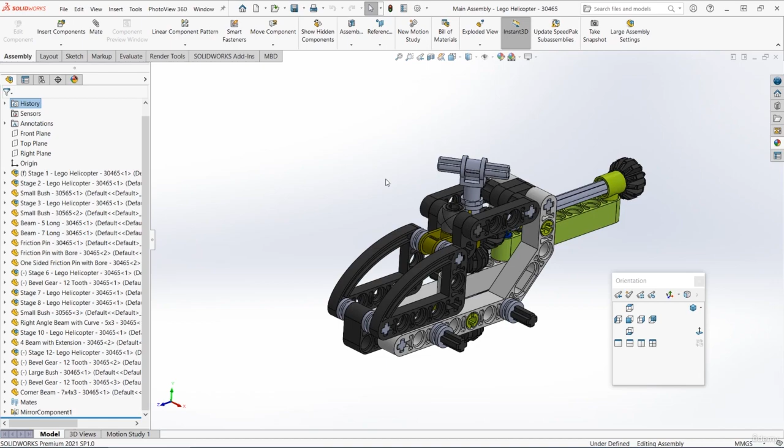Welcome to stage 18. For this we've got to make 3 new parts, and the first one is pretty simple. It's just a friction pin that's got an axle that's 2 blocks long on one side of it. First I'm going to open one of our existing friction pins. I'm going to spin around and have a look, and there's one underneath here, so I'm going to click on that and press open part.

Then let's save this part as a copy. So go to File, Save As, choose Save as Copy and Open. And I'm going to call it friction pin with long axle. We can then close the original document, and now let's make some changes to this new part.

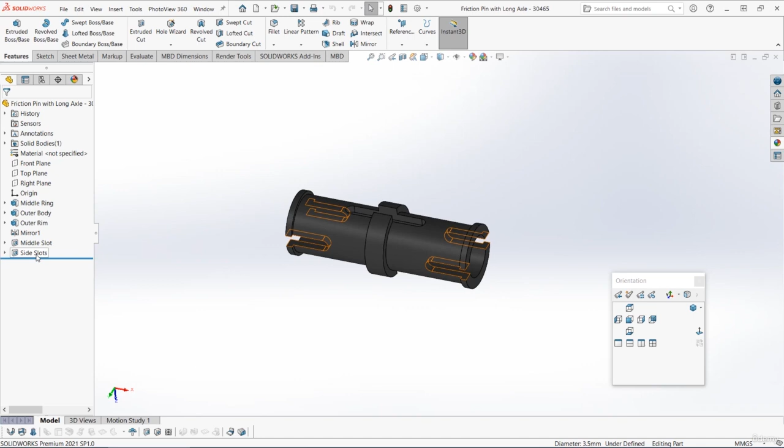Firstly, I'm going to drag up to that middle ring, the first feature. We actually only want this to be half the thickness it is now, and we only want it to go in one direction instead of mid-plane. So let's edit that feature. Let's change it from 1.6 down to 0.8, and let's change it from mid-plane to blind. Then you can exit that feature, and we can go down below the next one, the outer body.

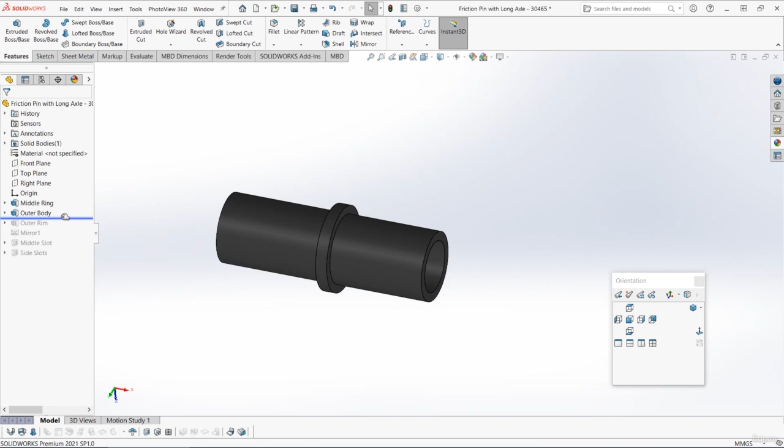This one also needs to be half the thickness and also just going in one direction. So let's edit the feature. For the value here, we can divide this by 2. So just click in the box, and after the number, just put /2 and then press enter. That will divide that number by 2. So that should be 7.35. We can then make this blind instead of mid-plane.

For the outer rim, let's keep that the same. Then for the mirror feature, we no longer need that because we've just got the rim on one side, so we can delete that. The middle slot, we don't need that either, so you can also delete that, and you can delete the sketch underneath it. And then for the side slot, we can keep that as it is. So we've got the pin half of the part. Now we need to add the axle to the other side.

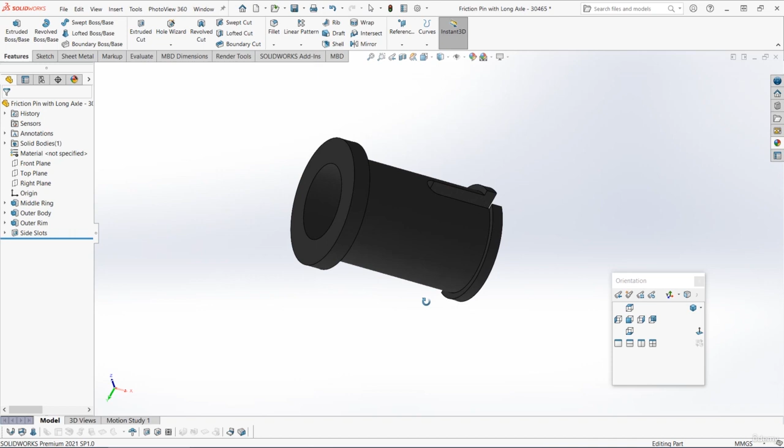To do this, let's start a sketch on this face, and we'll draw our usual axle shape. So get the circle tool, draw a circle at the origin that's 4.8, and then draw our 2 center rectangles. Hopefully not too bored of this profile yet. They should be 1.8 wide, and then the length of them is set by adding those tangent relations to link them to that 4.8 circle.

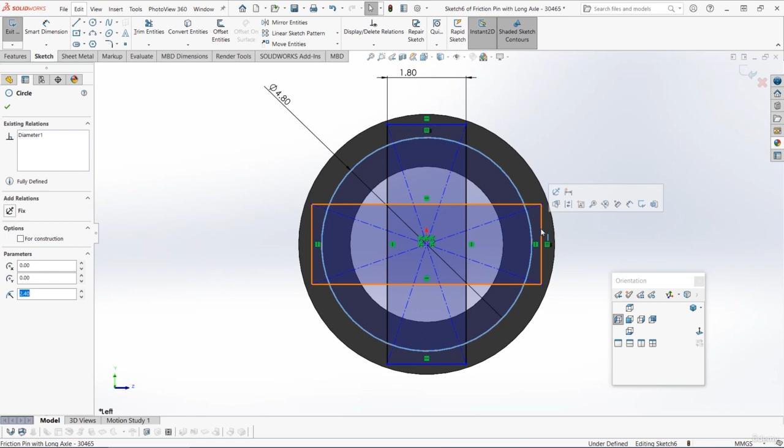Then when you've got that profile, we can extrude it as normal. So let's go to Features, Extruded Boss/Base, and in the selected contours, let's choose those 5 areas of the cross. You might also need to click on these outer areas as well, just because of the way the sketch is made. So we should have something like this.

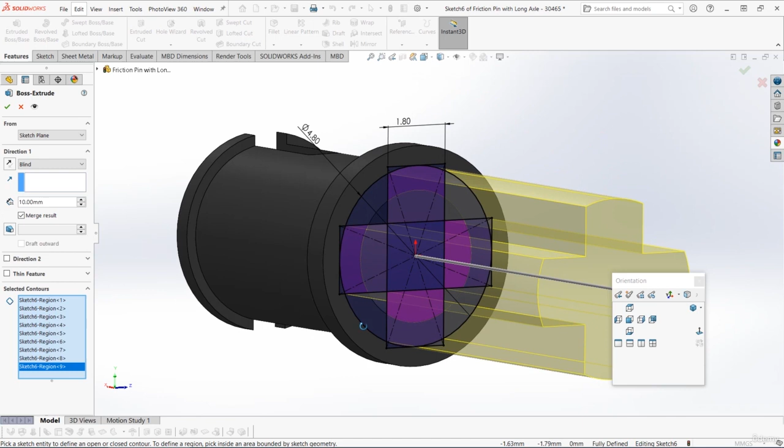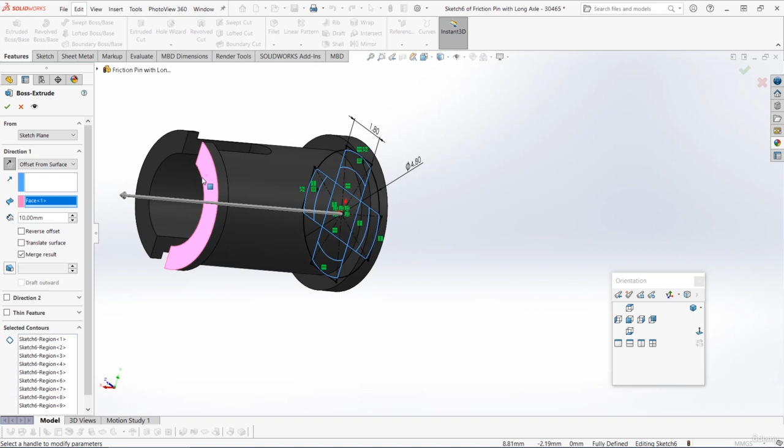Now the total length of this part is 23.8, but that includes the area of the pin that we've already made on the left. We don't actually have to calculate the length that we need to extrude this side. Instead, we can just use offset from surface. To do this, go to the end condition dropdown and choose offset from surface. Then in the surface box, let's choose this end face here. Then for the offset distance, we can write in 23.8 millimeters.

And then you might need to flip the direction of the extrude by clicking this reverse direction box here. And you should see a preview something like this. Now, if you can't see this, you might need to press this reverse offset box here. If you can't see a preview, try unchecking that reverse offset box. So this means that our extrude is going a length of 23.8 millimeters from that face that we chose on the left-hand edge of the pin. Let's press OK to make that.

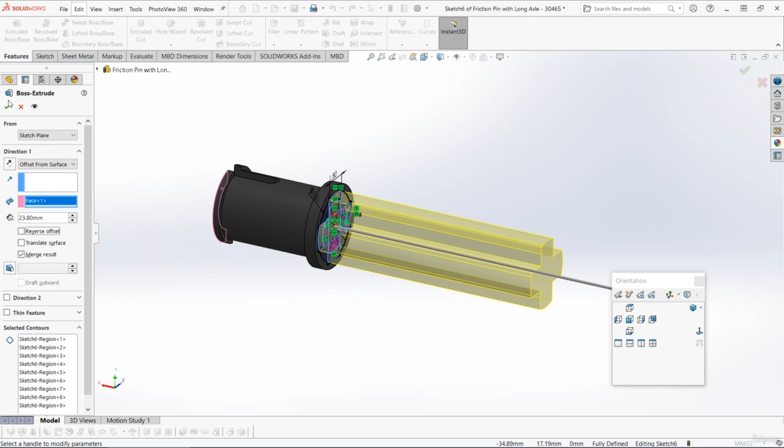And as a double check, you can go to the Evaluate tab, you can get the measure tool, and the entire length here should be 23.8 millimeters. Then let's just call this feature axle. Next, we can add those little fillets to the end of the axle. So get the fillet tool, set 0.5 in size, and just select those 4 outer edges like we usually do for the axle parts.

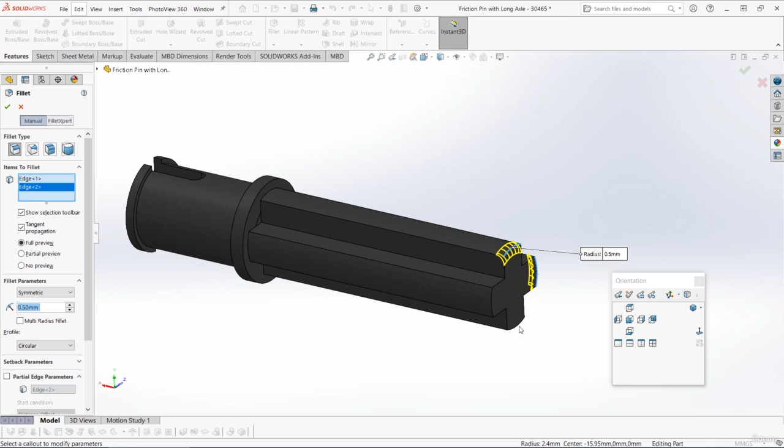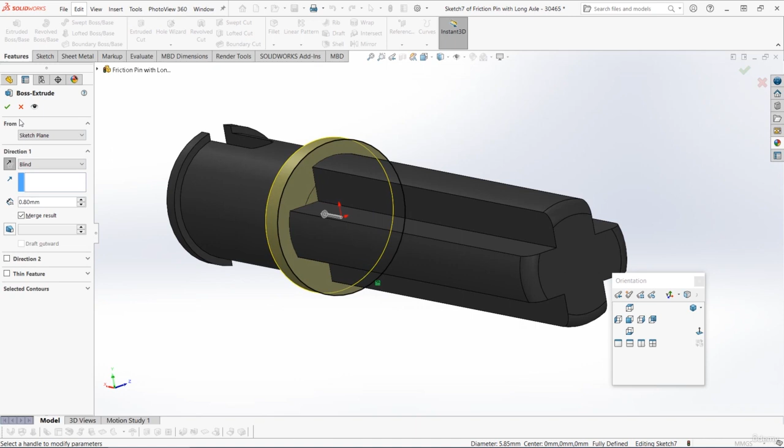And then finally, we've got a little gap here that we shouldn't have, so we're going to fill that in. So just start a sketch on this face here. Let's choose that outer rim and press Convert Entities. And then let's just extrude that circular area 0.8 outwards in this direction, just to fully fill in that base there, and let's call that axle base. So there we have a friction pin on one side and a long axle on the other side, and we can save that part. In the next video, we'll make the tail rotor.